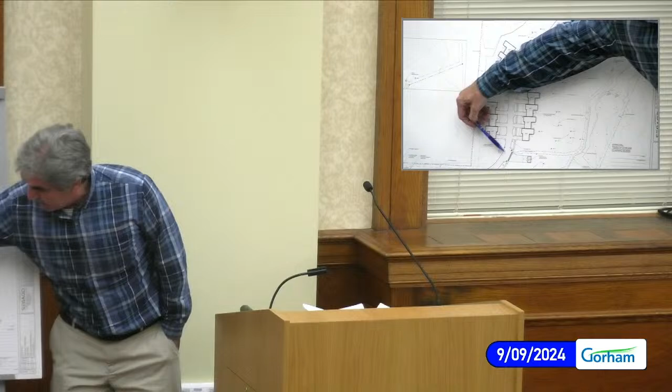The first has to do with comments we received on the radius of the driveway coming into the site. As discussed in the preliminary review, the project is accessed by a private condominium driveway, not proposed as a public or private road. Although it's designed so it could potentially be extended in the future, it still remains a private driveway, so we don't believe the road standards per se apply. However, we did provide information outlining how we approached the design—the driveway comes in off McClellan Road, and following the terrain and layout of the property, follows a 135-foot centerline radius through this curve before continuing through the site. The comment is related to the radius of that curve.

If this were a private road, one of 2 standards could apply. The town standards for a private road serving 7 to 10 lots requires a 130-foot radius. The next increment, for a road serving 25 or more lots, requires a 200-foot radius. We had discussion with town staff at our meeting on August 28th, where the Public Works Department and the Fire Department were both present.

Our understanding is that they don't have any concern with the 135-foot radius as it's proposed on the plan. Due to the low population that the project serves, adequate sight distance and grades, they felt that that was an appropriate design for a private driveway. And so if the board determines that the road standards do apply, we've requested a waiver to allow the 135-foot radius.

I would just note that there were some comments, the latest comments we received Friday from Wright Pierce, again, sort of addressed this. They weren't privy to the discussions that we had had with the staff, and so they weren't aware that we had kind of worked that out with the staff.

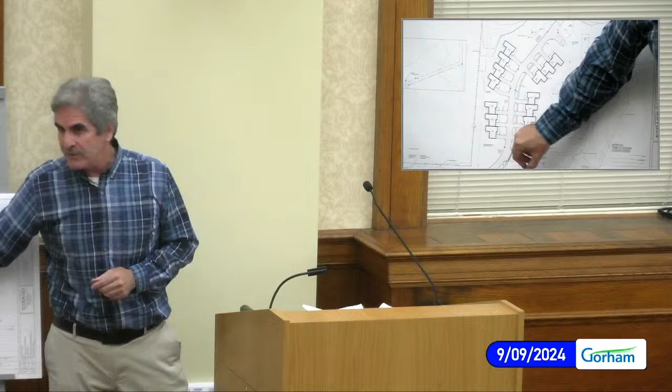But just for the board's information, if that radius of this section of the roadway were revised to be 200 feet, it would essentially pull the edge of the roadway this direction, kind of to the south, towards the abutting property, and to the point where the shoulder of the road would actually be in the side setback. And so it just moves the grading and the construction of that closer to the abutter than we feel is necessary.

And so if in fact the board determines that the road standards would apply to a private driveway, we have asked for a waiver to allow the 135 feet, understanding the staff appears to be in agreement that that's an appropriate design.

The second waiver request is the hydrogeologic analysis, the mounding and nitrate analysis in the ordinance. Typically, sites that have septic systems greater than 2,000 gallons per day, which is typically the threshold for an engineered system, require a mounding analysis for groundwater and a nitrate analysis for impacts to that.

Although the overall flow combined for the 4 systems is more than 2,000 gallons per day, no single system is any more than 1,080 gallons per day, and they are separated with all the separation standards that make them a non-engineered system from the site standpoint. There's a couple other factors that we wanted to point out as part of that request.

If you review the test pit information that was submitted as part of the HHE 200 forms, in all but one of the test pits that were conducted on the site, there was no mottling of groundwater apparent. The limiting factor for these septic systems is the presence of ledge, anywhere from 2.5 to 4.5 feet below. And the terrain here, the septic systems are sort of a localized high point in the center of the site.

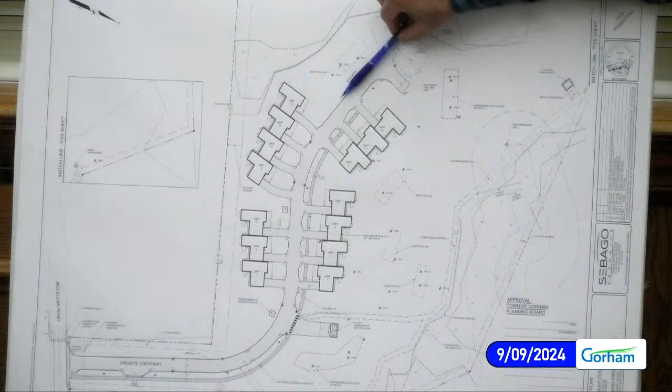And the systems, as they're arranged, drain in different directions. So the two larger systems drain, one drains this direction, the other drains this direction, and then the smaller systems drain generally in a northerly direction. So we don't think that there's a significant influence on groundwater. There was none present in most of the test pits that we observed. And so the mounding is less likely to be a concern.

The other factor that we think plays into that is that as far as nitrates go, certainly a nitrate study can be performed. But as you can see from the site layout, each of those systems drains toward on-site wetland areas. And typically any nitrates that are present in the effluent of septic systems, when it reaches the wetland area, that's generally mitigated very quickly because wetlands tend to take up nitrates. And so in all the cases here, any nitrates that remain are not likely to progress anywhere off-site.

So those are the two bases of those, but certainly if the board's not comfortable with that, we have discussed it internally, and that hydrogeologic analysis can be performed, and we would just ask that we potentially do that as a condition of approval if the board considers it necessary.

The final waiver does address the building materials, and in your package are our updated renderings of the buildings and updated elevation drawings. We submitted a revised sheet A200, which is the elevation drawings for the building. And as we listed in our application, we defer to the board, but we believe the project as it's designed may meet the intent of the ordinance.

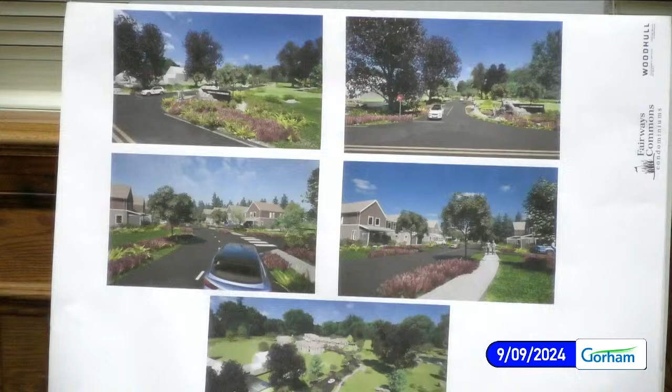Thank you. Please, members of the board. Mr. Chairman. Thank you. I'll start off. Excellent presentation, Dan. Thank you. I want to start with a question for Chuck, for the town engineer. The discussion on the septic and the comments, I read the comments from Wright Pierce. I've heard Dan's explanation, which is very thorough. What is your view of that issue? Thank you.

I don't see it much different than 4 systems that are less than 2,000 gallons per day that were in any other subdivision. And to the applicant's point, these septic fields are situated such that they drain with the topography, and so I understand Wright Pierce's comment as an aggregate. They exceed that 2,000 gallons per day, but individually they don't, which I don't see much different than any private single-family home's septic system. Thank you. That's helpful.

Comments? David Burrows. Regarding the radius, the request for 135-foot radius, I actually see some advantages to that in that it'll calm traffic more than a larger radius would. So I see the advantage in that it'll calm traffic down before it enters into the condominium area. So I think it could serve to slow traffic down. So I see the advantages of that.

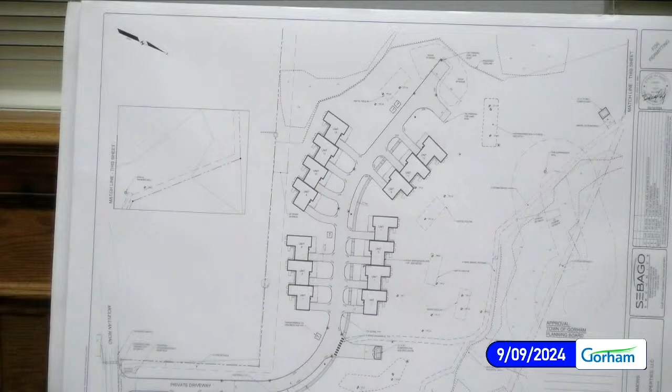Yeah, I think, talking to the architects, the building is relatively detailed, and they are multi-unit buildings, so there's some repetition to it. If you look at the site plan layout, I didn't mention in my discussion there's some additional articulation in the buildings in that they step back from each other, fading away from the site to give a little more privacy in what is a relatively narrow frontage.

I'm not an architect, but I want to paraphrase it. We felt that adding another material to what's already a fairly detailed and a little bit intricate design actually maybe takes away from it. It becomes busy. We thought that the form of the building met the requirement, and that adding more materials in such a small facade would look busy.

I don't know the genesis of the standards that were put into this district, but from our discussion on other projects, this district envisioned and does envision, in addition to this kind of development, much larger scale multifamily residential, larger buildings. And in those kinds of buildings, multiple materials are sometimes the best way to break up the scale and massing of the building.

And so certainly with a larger building, you can present more materials without it feeling cluttered or busy or taking away from the architecture itself. On a smaller, more residential scale building, that's a little bit harder to do. And I think you probably see that borne out in your life walking around buildings. You don't see a lot of buildings of this scale with lots of different materials.

It becomes busy, and the architects thought that the form of the building was an attractive building. It provides a lot of detail, and that adding more materials to that could take away from the architecture. Thank you.

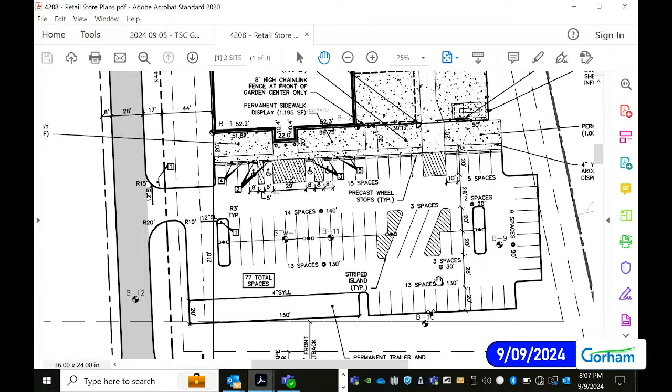Mr. Frank. Thank you, Mr. Chair. I like the idea of the potential shared driveway for other developments. I mean, it only makes sense, right? Otherwise, curb cuts and traffic studies and all that. So, thank you. Good idea. Yep.

Mr. Chairman. I'm sorry, Mr. Walsh, yes. Yeah, Dave Walsh. But I want to piggyback on my colleague's question. When I look at the site to the, I guess that's to the west, parcel B, it's a larger site, larger lot. Yep. Does the existence of that driveway constrain the future use of that lot in any way?

Based on the opinion of the seller, not at all. That's exactly how they wanted it. They requested it to be that way. So I guess I'll throw it over to Chuck. Is there enough room to put another driveway into parcel B if a future business required it?

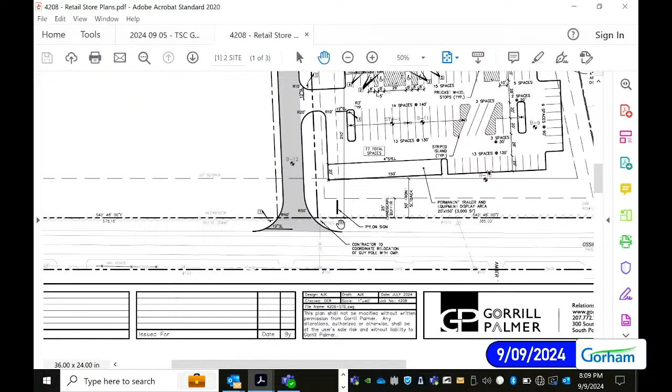Can you zoom in on the frontage of parcel B? Yep. It's like 578 feet. Yep. Yeah, we're 385 and there's 578. Yeah. Technically, without looking at the access management standard, I believe Ossipee Trail in that location is 45 miles an hour. It is. I'd have to look at the tables, but I think that's somewhere in the ballpark of 400 feet between driveways. But I would say that shared driveway should be very attractive for any future business to connect to.

No, I mean, I agree with Russell in that it's great to plan ahead like that. I just wanted to see if there's a possibility that it actually constrains the use of that lot. Looking north on Ossipee Trail to see where the adjacent parcel's entrance is, I would say there could be, but I don't have all the information at this point.

Yeah. I would add one thing to that. Sure. Because there is a wetland on the other parcel. Okay. Parcel B has a wetland? Yes. Oh, it does, okay. So that's more of a constraint than a driveway location. Yeah, definitely hear you on that one. Okay, otherwise, I like the looks of your plan. Thank you.

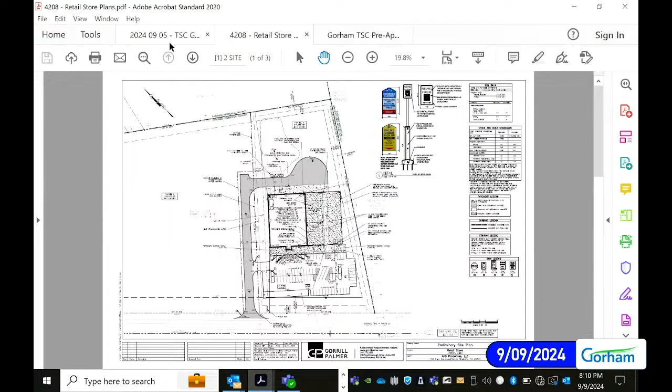One thing I did forget to mention is we did provide building elevations. Again, you've probably all been to them. It's Tractor Supply. Ms. Ironman asked for a couple of additional items. We are going to provide a black vinyl coated fence for the outdoor display area. And there's CMU walls, split face concrete blocks, Hardie Board siding, and again, the front awning is the standing seam roof panels.

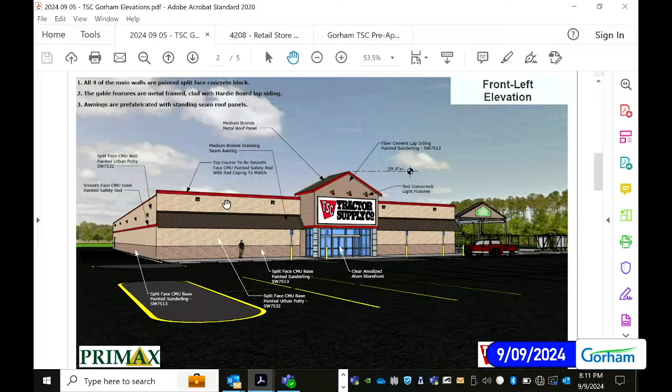Mr. Reynolds, that version you have of C-101, that drawing has been revised from the C-101 that we have in our packs. The lower left-hand corner. I'm not sure. I submitted this one the day after Labor Day to the staff. I'm not sure if it got into your packet. The previous one was this one. So that radius, as you come in and you turn to the right, is a radius, right? Yeah, slide down, right there. Yep. So if we go to the previous drawing. Yep. All that is squared off because this is trailer display area.

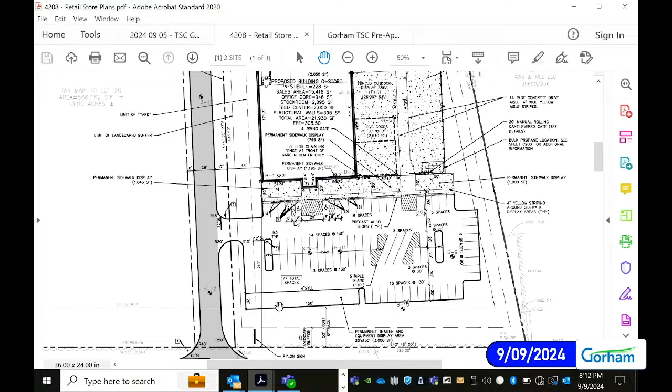Sure, I just wanted to point out to the board that the drawing that we're looking at on the screen is not what we have in our packs. Correct. Thank you. Because again, we had parking out there on the previous one, and staff discussions had us remove one row. Thank you. Mr. Burrows, please.

So they're 22,000 square feet in Windham? Yep. Same as this? Yep. Same layout? You don't know you're in a different store once you're in it? Pretty much. I didn't do the Windham one. I'd done Augusta and Thomaston, a few others. Okay, again, it helps to understand. I didn't know if this is going to be smaller or bigger than the one I'm familiar with. No, same size.

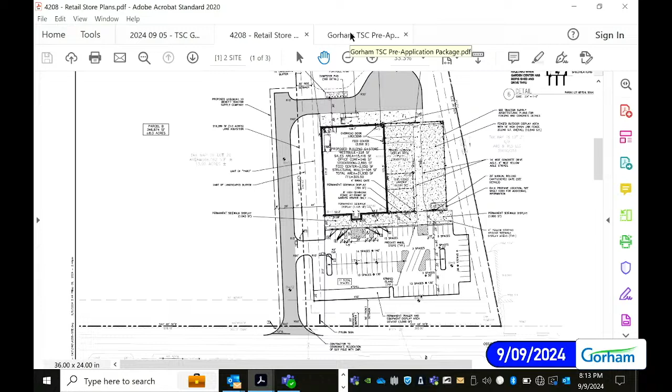Okay. And then parcel B is what, 585 feet wide or 578 feet? Yep. And is the parcel to the west of that the Kubota tractor? That's Kubota, yes. Okay, so it helps me to know where this is. Yeah, looking at this overall, I believe the Kubota driveway is almost the same width, further to the northwest. But I'm not sure. Okay, those are all the questions I had. Thanks. Yep.

Yes, Mr. Frank, please, follow up on the parking. Personal observation, I'm a big fan of Tractor Supply. I've been to both the Scarborough and the Windham location, and at Windham, there's plenty of parking.

Oh yeah, that's the one I go to. That's all.

Mr. Reynolds, if you don't mind. In the packet we have two drawings labeled C-102, but they're actually different drawings. One's a preliminary utility plan, the other is a site preliminary grading and drainage plan. Is one of those been renumbered? What did I do, give you 101 and a 101? No, 102 and 102. So the one you just looked at, C-103, what was the title block, please? 101, 102, 102, look at that. Yeah, sorry, 103 is going to be the grading plan.

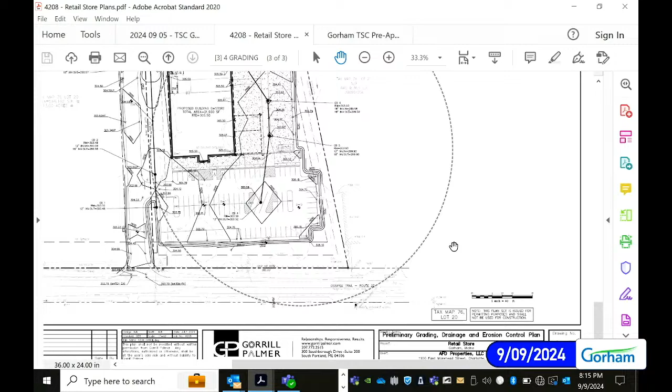Members of the board, anything else? This is a discussion sketch plan review. We do have a waiver in the back if you're so inclined.

Colonel Benson, you're recognized. I'd like to grant a waiver for Chapter 2, Sections 222, to allow 77 parking spaces rather than the required 110.

Thank you, Colonel. Is there a second? I'll defer to Ms. Nichols because she raised her hand just before you spoke. Thank you, Ms. Nichols, for the second. Any other discussion on reducing or allowing the reduction of parking spaces?

All those in favor? Anyone opposed? Thank you.

Mr. Chair, I would like to make a motion, Colonel, please, to grant a waiver from Chapter 2, Section 210B, which requires the extension of the public water supply. So we're requesting a waiver so that they do not have to extend the public water supply system to the new development.

Second. Thank you, I will second that. Thank you, Ms. Nichols. Any other discussion? All those in favor? Anyone opposed?

Thank you very much. Thank you, sir. We'll look forward to coming back, and thank you for connecting me. Thank you. Been a lot of buzz about this project, so good luck.

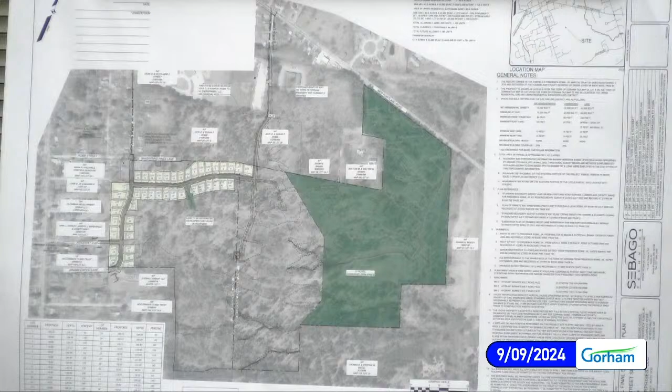And I'll turn this here. So just to give you context for the plan, this is the overall parcel. This large area in green is the 51 acres that would be conveyed to the Presumpscot Land Trust. As you know, we've been working diligently with them throughout the entire project, so they've been involved from the very beginning. I'll show you the next component, which would be the project as you're looking at it now, the first phase with its green space in the middle. Does this actually work so I can take it with me? I think that works, right? No. No, it should work, keep talking. It takes a second — is it on? Yes, that's on, there you go. All right, I'll take it with me.

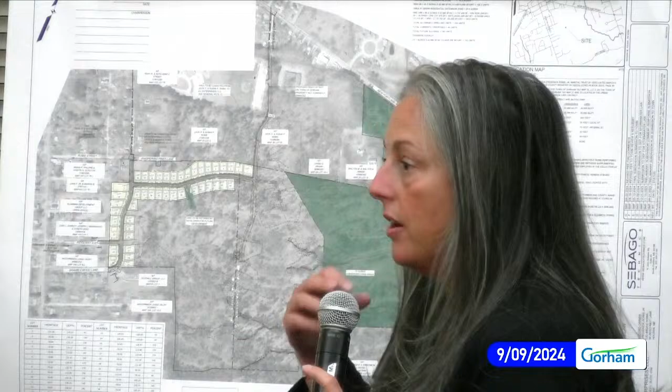So just to give you an orientation, between lot 38 and 39 is a proposed formal green space. This would consist of green area, the preserved trees that we can keep in that area, as well as a small pedestrian plaza and a small sidewalk area. This would be envisioned to connect to a larger picture.

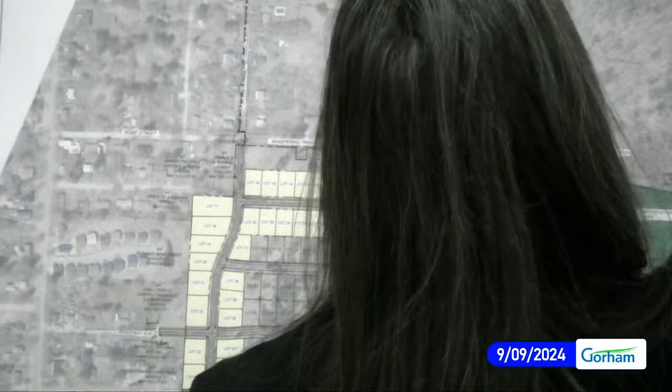Need more hands? That's perfect. Look at that. Together we can do anything.

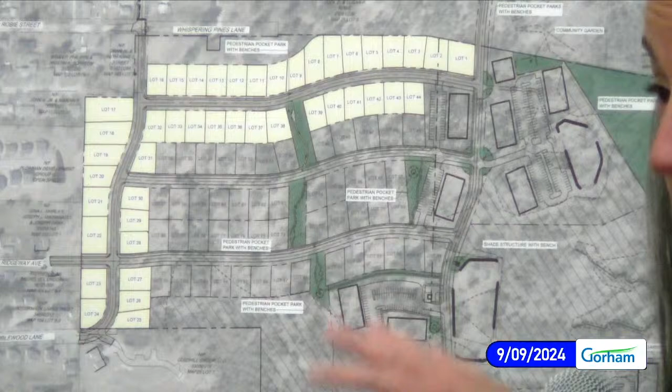This shows you the vision of how all those interconnected formal spaces would connect to the greater picture, providing pocket parks, amenity areas, and interconnected walkways. It really creates a multi-generational connection within the development itself, so it's not just one pocket park. You would see those connecting through at all intersecting nodes, with a number of community garden spaces, and then the 51 acres. This project envisions putting the 1.93 acres of formal dedicated space together with the 51 acres.

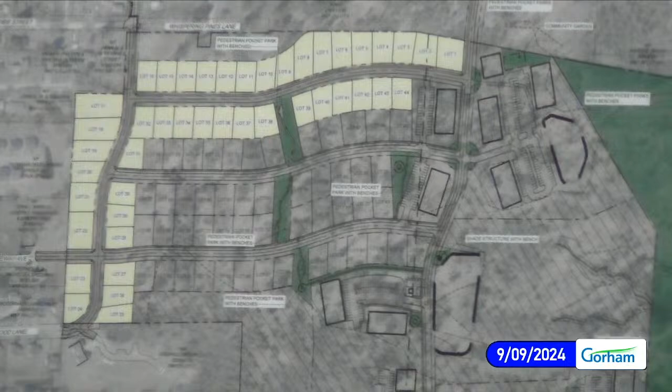And if I were to show you the formal for this phase... I don't have technology with me. I got it. You got it. I just need two more arms.

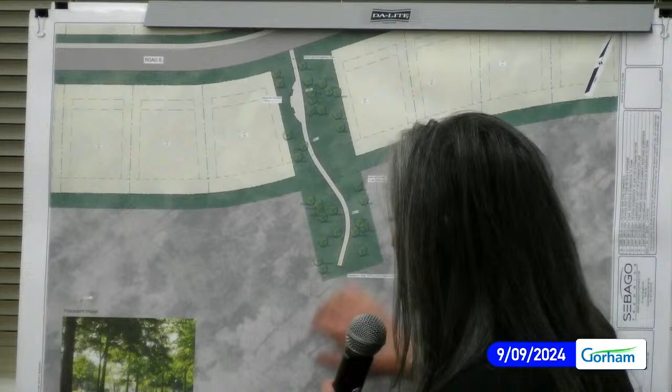You can get an idea of how that interconnected green space would bring that parkway through, and an idea of just the canopy we're hoping to preserve, as well as the sidewalk and bench areas. So a nice intermediate area to break up that streetscape facade, offering a little bit of green and soft space between the development.

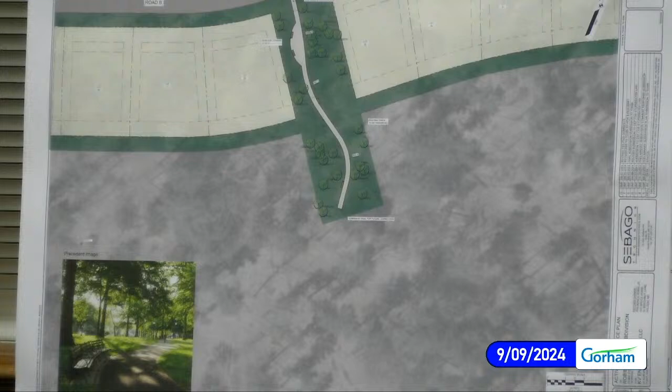I'll be your assistant. I think you know I'm good. I'm just going to go back to that one.

As this board will recall, a lot of the conversations we had as we started through the overall concept were about the interconnectivity of everything, to have the mid-block connections, if you will. So in terms of the open space plan Kylie was presenting, the whole intent was mid-block connectivity working its way all through the development and back into the open space, to tie back into the potential trail system being discussed with the Regional Land Trust.

Mr. Chairman, I think we've concluded our presentation. We hope we have addressed the majority of items discussed at the June meeting. We appreciate the time with staff, and we did meet with them at the staff meeting two weeks ago. We see the final items as relatively straightforward, and it is a condition of approval that we address those through staff. So if the board would be comfortable, we'd appreciate a final approval of the 44-lot subdivision. I'd be happy to answer any questions the board has.

Thank you, Mr. Frank. If I can jump ahead, because I know the board has many things, I'm very pleased, as I'm sure everyone else is, to see pocket parks.

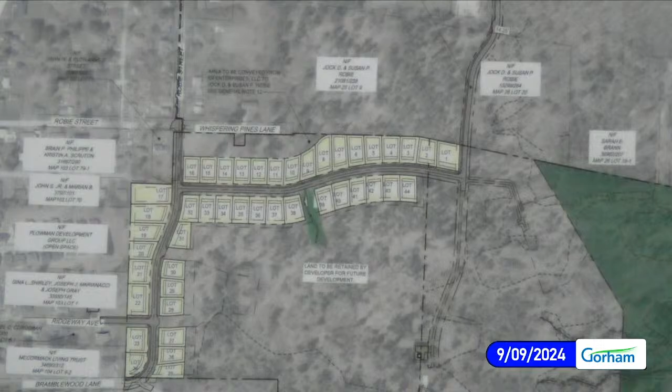Is that just curvilinear, there's no stream or anything else like that? No, that's simply to weave around the trunk. What we did is we actually located all the trees that are there, and then we determined where the pathway was going to go. Excellent, thank you very much for clarifying that.

That's all I have right now, thank you. Any other members of the board, please?

Mr. Walsh. Thank you, yes, I'm happy to see the pocket parks. Honestly, though, I would have liked to see you utilize more of the space in this area to add a little bit more, but I see what you've added. So just to clarify, you've already gone out and identified and marked those trees that would be within that specific phase, that's correct, yes. How will those trees be protected during the construction phase?

Within the plan set that you have, the trees that are shown are the trees proposed to remain, and those would have a protective tree barrier around them. They'll be protected to the best of our ability, but generally that's an orange perimeter fence, normally the same size as the canopy. But if any of those trees are lost, if the roots get hit, it happens. Will you replace and plant other trees in those pocket parklands? Sure.

I think it's a good question. I think given the type of trees that are there, it'd be dependent on what, if anything, was impacted and if it can be replaced. So you have to think about the canopy of what's existing. Sometimes our best intention is to say, absolutely, we'd replace the tree. But if the canopy is such that it doesn't make any sense to put another tree within that location, I think we just need to be mindful of it.

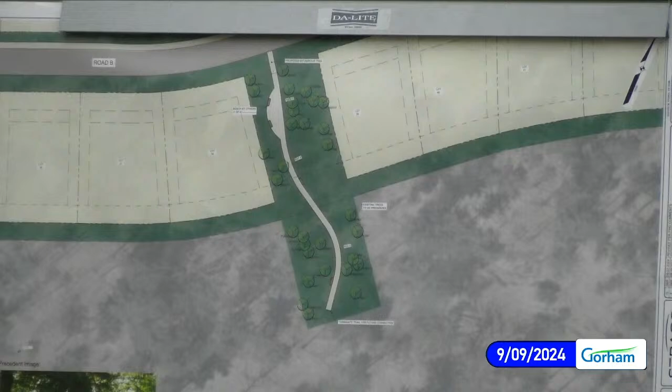In terms of tree height, if there was a fall risk, I guess the alternative would be to remove the tree and put in a different tree. I don't think that we're there yet. On either side of the property, 38 or 39, we're really talking about 2 beeches and 2 pines. And I don't find those to be trees that would pose a great risk to a structure depending on their height.

If they're a significant pine, a white pine that would fall or could break in half, then I think probably the flexibility granted to the applicant to remove it and replace it with a similar species, right? Because I think in those particular areas, we're not in a canopy risk. Okay, all right, just sure, and thinking it through. That's what I'd just like to see. Absolutely. All right, thank you.

Ms. Nichols, please. To kind of tag on to the same topic here. So when trees are in the middle of a forest, a canopied forest, they either have branches on one side trying to reach for the sun or on another side trying to reach for the sun and are not well balanced. And when you cut all those other trees out, you may end up with unbalanced trees, which are what we see on the side of the highway when they went and cleared all that. Now all of a sudden you see all these trees uprooted all over.

So I think just mindfulness of that, and that may be part of your world nowadays, is to be mindful of that and watching to make sure you don't have a tree that's not balanced, and if it isn't, that if it's one that you've selected, you put in some safeguard. I don't know if a cable would be or what it would look like. Sure. But you just mentioned 4 trees, and there's a lot more than 4 trees there. Sure, those are the ones that are lining the property line.

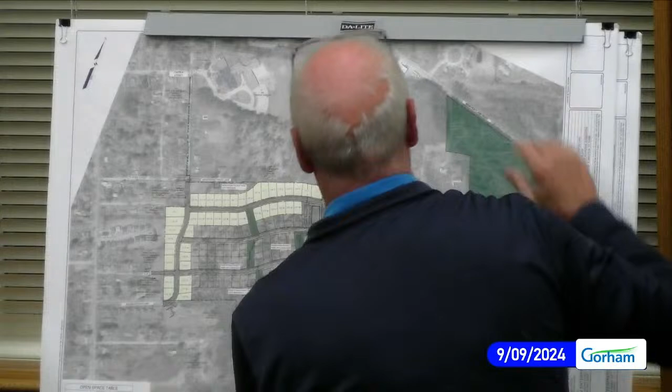On the other map that you've shown, can you just remind me where Phase 2 and Phase 3 are? Well, I don't know that you've determined phases, have you? I think one of your pictures might have showed it, so they're just stacked, one right on top of, yeah. So during Phase 1, are you gonna just be cutting Phase 1? Absolutely. And leave everything else there until you're ready to go into Phase 2 or Phase 3? Yes.

Phase 1 of the necessary infrastructure, so obviously that would include the access drive to the pump station itself, the stormwater management pond, and the access road going back to White Birch Lane. Aside from that, no, we wouldn't be doing any additional cutting within that area. Again, this is the plan we have at this point in time.

As you all know, this is kind of predicated upon a contract zone process that is somewhat still in flux, if you will. So again, in terms of the overall plan, what we really wanted to show in association with this was the overall 51 acres and how this kind of connected into it. And the fact that as part of the overall plan, there are areas within there that we can provide the required active open spaces defined within the ordinance.

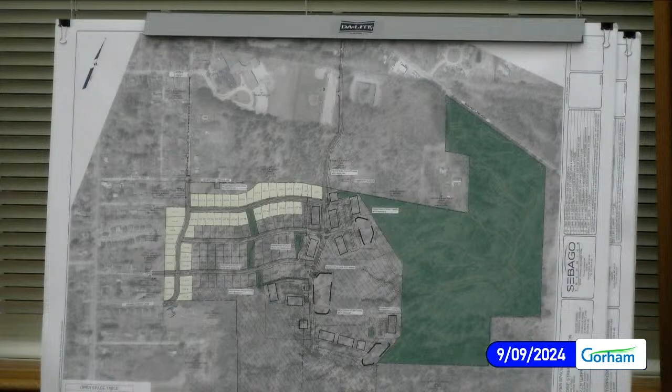That was really the whole point of the overall plan, understanding that this overall plan, for all we know, could change quite dramatically between where we are today and where it might be when we come back in front of this board. Yeah, so the 51 acres, do they get transferred during this build-out of these 44 structures? Or is that only if the contract zone is?

No, that's part of the sale of the property. So that actually occurs basically concurrently. That's gonna happen. Okay. The applicant buys the property, if you will, and the conveyance to the land trust occurs. Yep. Perfect. Vinny, that's my understanding, but before I open my mouth.

Vincent Meyer, I'm with KV Enterprises. That's completely true. We want to have all this stuff done up front as part of Phase 1, but we want to make the board understand this is what we intend to do for the overall project. So all of the things that we're proposing to do here, we think we're going to do all of those things, but for sure, we're putting up the 51 acres as part of Phase 1.

Yeah, thank you. But I don't want to come back to the next meeting and do the next phase and go, okay, now you need to put up another 11 acres or something like that. So we need to put up 13 to do the entire project. I think it's 13.1, and we're going to definitely put up 51 acres right away. Yeah.

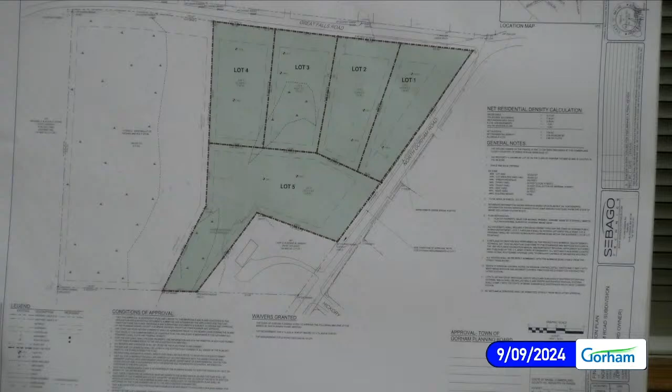Then the other item was, there was a request from the peer reviewer for a letter from the licensed site evaluator that suitable soils or test pits are on site for septic, and you could get wells on the lot. So we always submit the test pits that show passing test pits. The symbol shows that there are suitable soils on it. I'll be glad to have them do that if you want that letter. And these are pretty good sized lots, so we're not too concerned about that. But if that's something you'd like, I'll have Gary generate that letter and we can submit that as a condition

of approval. And we did submit a Class B high intensity soil survey map. Didn't provide the narrative because the soils are almost all identical. They're all sandy loam. So I wasn't sure that would bring any value, because all the narrative does is say these 3 types of soils are sandy loam soils, and this is the soil horizon. So I didn't see that it would bring any material value and that the plan was more important. We're more than happy to do it as a condition of approval if the board wants that.

I just didn't see that it really added anything to the technical support of the project, because the wetlands were mapped, the soils were dug, and frankly the plan provides the high intensity soils map that's signed by Gary, the site soil scientist, which provides much more meaningful information. So I'll leave that to the board. If you want me to do it, no problem, we'll do it. I was just trying to keep it simple. And other than that, we would be asking for preliminary and final. The staff conditions are fine, and we're ready to go forward tonight. I told you I'd make it quick.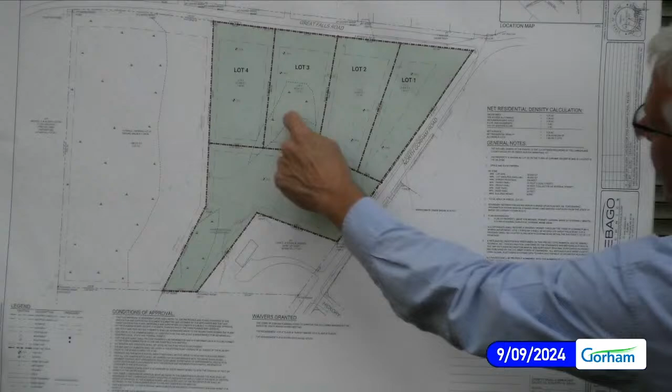I've got a question on page 6 of the notes. The stormwater comments for this project are as follows. Number 3, while not a Maine DEP requirement, the applicant should consider alternate plans which maintain the existing vernal pools in the parcel. So does that mean that there are vernal pools in the parcels? There were non-significant vernal pools by the DEP standard on it, and that is in the wetland that is right here. We're not proposing to touch any wetlands. There are no wetland impacts as part of the project, so those will be kept.

And when a house is built on that, will that affect it? No, because the wetlands won't be touched. They'll be preserved. Thanks for answering that. You're welcome. That's all I had. Thank you, Mr. Burrows.

Anyone else? Please. I have a question for the staff on the narrative report, because I don't see it as a waiver here, so is it not something that you expected us to consider, or are we expecting that to be a condition of approval? I didn't see if it was written in the conditions of approval. Or do we need to have a motion for a waiver, or is that something that we don't have to consider? It could be a waiver if you wanted to waive that submission requirement. What's the staff's position on whether the narrative is needed? We'll do it either way.

Just to be clear, the planning board did already waive the requirement for a Class A survey to a Class B. So that's what we're discussing. So has the Class B survey been provided? The map has been provided, but not the narrative that would typically be attached to that to make it a complete report. We'll make it simple. I'll just do the narrative. It's 3 pages. Thank you. This is exactly my opinion. We'll just have them do it. It's not worth taking your time over that. Okay. We'll do it.

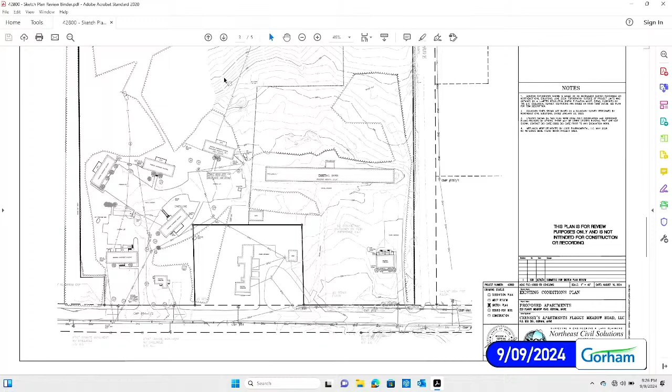You can see there's also a big barn located in this part of the site. And I'll just back up a couple. I have an aerial of the site, which gives you a little better picture of the landscape. You can see the 5 apartment buildings in this location, the single family, the duplex over here. Lots of nice lawn areas and landscaping, the barn area out back, and the wooded area beyond.

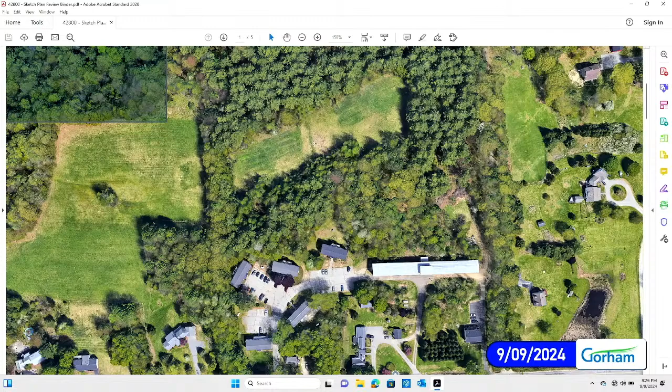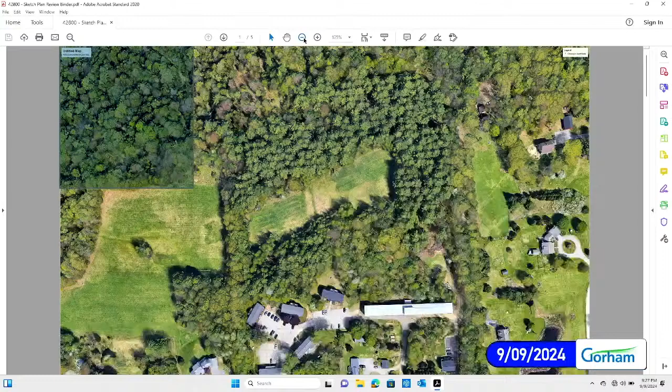These open areas out in the rear of this particular site service wastewater disposal systems for the existing 5 apartment buildings located here. So from there, I'll move on quickly and show you the boundary survey for the project. So the site we were looking at is all located in this area over here. This boundary survey was for 3 particular parcels, all owned by Cressey Apartments, Flaggy Meadow Road, LLC, all separate deeds and separate parcels.

Parcel A is off to the west of the proposed development. That includes 39.8 acres, plus or minus. Parcel B in this location in the center is 26.8 acres, and parcel C, located on the east side, is 19.6 acres. You can see Little River crosses through parcels A and C on the north end of the site. And again, here's the proposed Cressey Apartments expansion project, an existing development, which is all located on parcels B and C.

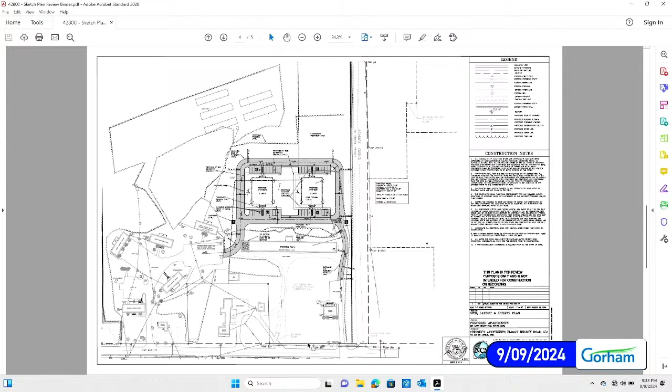Wastewater disposal: there is no public sewer in the vicinity of the site. We are proposing on-site wastewater disposal systems with a capacity of 1,500 gallons, two separate systems, one for each building.

The soil conditions on this site are pretty good. We did have an initial wetland delineation done for the development area. Soils were good, no wetlands were found. The limiting factors in any location here would be the shallow bedrock, which exists on the easterly side of the site, but there are adequate soils between the two buildings.

There are some good soils between the parking area, in the vicinity of the parking area and the barn, especially to the east side. Our site evaluator did his field work recently and is currently working on those designs, so we'll have those for you coming up in the future.

Finally, I'll go to the site grading. Let me blow this up a little bit. So the grades for the site go down as you move from the road. The grade at the road at this location is around elevation 260, and as you progress to the rear of the site, back here, it's elevation 240. So it's quite a distance.

Grades are relatively gradual until you get back to this location, but it does slope from the road down, going back toward the river. The two buildings are proposed to be the high points of this particular grading of the site.

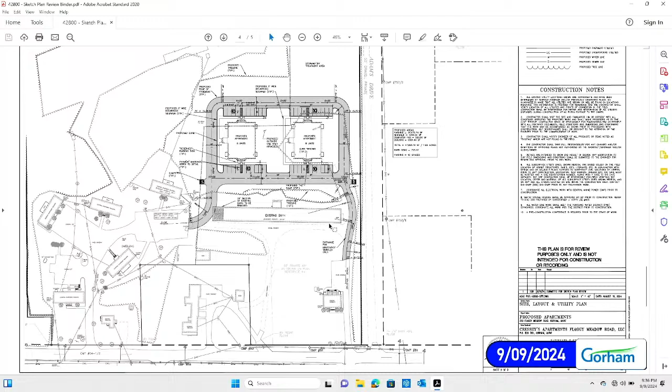I think we are fully on board with all the initial comments. We're anxious to hear your input, but regarding the private right-of-way, we aren't proposing a private right-of-way. We're proposing access to the site from the public right-of-way on Flaggy Meadow Road, again through the existing apartment complex as an extension to it, with a secondary access on the east side.

And I think that's about what I had. I'm certainly open to any questions or comments.

Thank you, Mr. Garish. Members of the board, Mr. Frank, first — lovely detailed sketch plan, nice work. Thank you.

Mr. Walsh? Yes, and yes, it's a very comprehensive sketch plan. Thank you. Just two questions: first off, what is the barn used for?

I haven't been in the barn myself, but it's used for storage, I believe just storage. I'm just curious, having driven by.

Secondly, when I look at the site, I realize these are two-bedroom apartments, correct? They're all proposed to be two-bedroom apartments. So your driveway orientation, it's going to work, it's a little awkward the way it's in the back there. And I'm thinking, two-bedroom apartments, you can still have parents with kids, school-age kids — I'm thinking about the bus stop and how they'd walk out to the street.

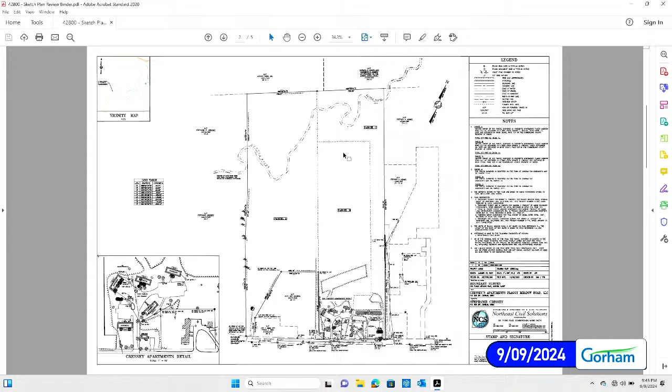There is also a requirement for a high-intensity soil survey. This parcel is served by public water, so I'm not sure if we need to request a waiver to do the Class B survey as opposed to the Class A survey. Secondly, we have areas on the site, particularly back here, that would be in the 100-year flood zone, potentially some areas of steep slopes and isolated areas across the river, that would automatically be deducted out of the net density calculations anyway. We'd ask for a little leniency, since our whole project is happening in this little area up here. We understand we have to check for wetlands, but if we didn't have to do a high-intensity soil survey over the entire site, particularly the areas in the back that are going to be deducted anyway, that would be helpful.